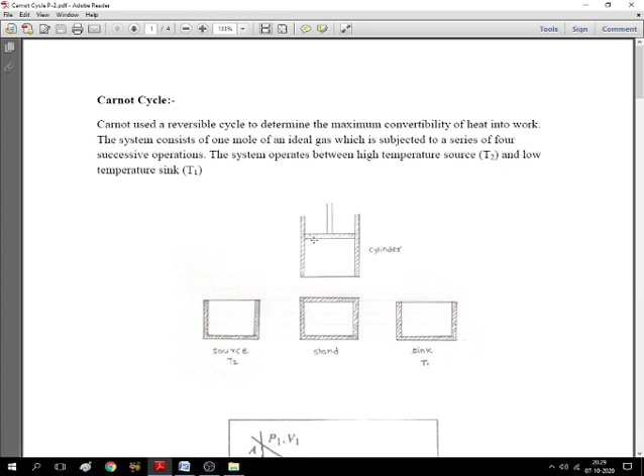It has a source of heat energy at temperature T2, a sink to which we add heat energy at temperature T1, and a stand which is an insulator. These four parts represent a heat engine, which performs 4 operations.

First operation is isothermal reversible expansion, represented by curve AB. Second is adiabatic reversible expansion, curve BC. Third is isothermal reversible compression, curve CD. Fourth is adiabatic reversible compression from D to A.

In this way the operations take place so that the system returns to the initial state through these 4 steps, and that's why it is a cyclic process.

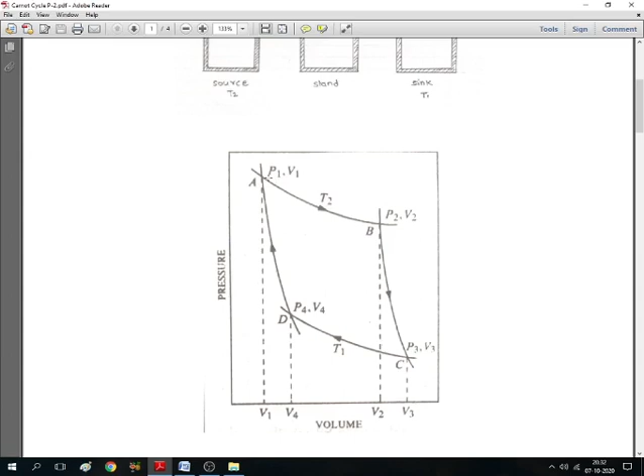Now let us see the mathematical part of this Carnot cycle.

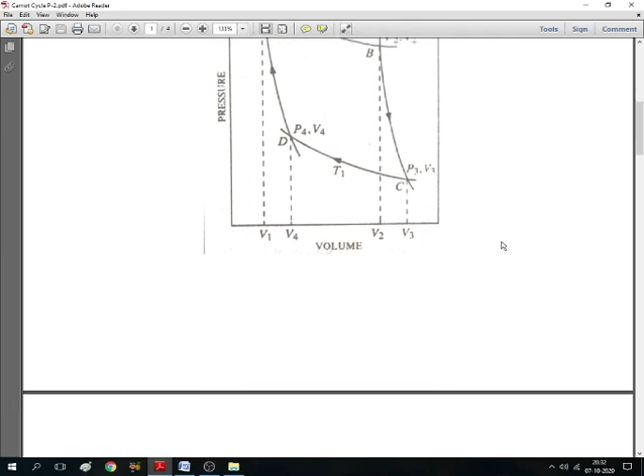The first operation is isothermal reversible expansion. The gas is allowed to expand isothermally and reversibly at a constant temperature T2. Volume increases from V1, represented by point A, to volume V2, represented by point B. As the process is isothermal, there is no increase or decrease in temperature.

When temperature is constant, the change in internal energy is also 0, so Delta U is equal to 0, since the process is isothermal. According to the first law, Delta U is equal to Q plus W. As Delta U is 0, we can write Q plus W is equal to 0. Rearranging, Q is equal to minus W.

Suppose this is the first step, therefore Q2 be the heat absorbed by the system and W1 be the work done by the system. Therefore we can write Q2 is equal to minus W1. Now this is the work done.

It is isothermal reversible expansion, and whenever there is isothermal reversible expansion, as we know the work done is of the maximum type, given by the equation W is equal to nRT ln V2 upon V1, where V2 is final volume and V1 is initial volume.

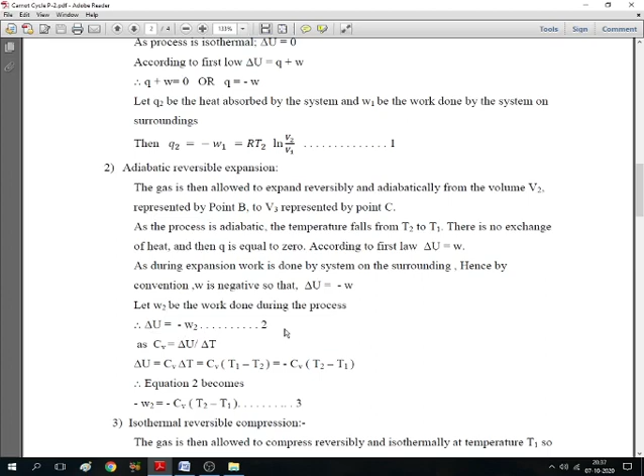Work done in the second step is W2, and here we can write delta U is equal to minus W2, equation number 2. But according to the definition of molar heat capacity at constant volume, Cv is equal to delta U by delta T. Delta U is change in internal energy, delta T is change in temperature.

Rearranging it, delta U is Cv into delta T, where delta T is change in temperature, final temperature minus initial temperature. Here our temperature falls from T2 to T1, that means final is T1, initial is T2, therefore it is T1 minus T2. Now taking the negative sign outside the bracket, this T1 becomes minus and T2 becomes plus, and we get minus Cv into bracket T2 minus T1.

Here the minus is taken outside the bracket, so our equation becomes minus W2 is equal to minus Cv into T2 minus T1, equation number 3. Now this is about the second operation.

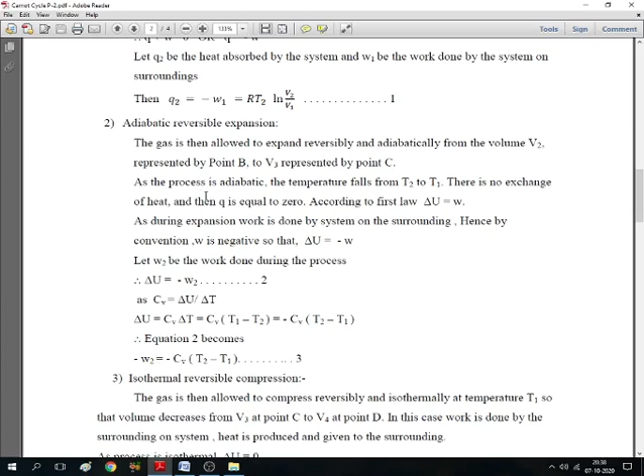Now the third operation, again it is an isothermal process. Compression is there, there is a decrease in volume, now the volume decreases from V3 to V4. Initial volume is V3, final volume is V4. The process is isothermal, therefore delta U is equal to 0. According to the first law, delta U is equal to Q plus W, and if delta U is 0, therefore Q plus W is equal to 0, or W is equal to minus Q.

W is equal to minus Q. Now this is the third step, and in this third step, whatever heat is generated, as the process is isothermal and compression is there, that heat is given to the sink, that amount is Q1. The process is isothermal, temperature remains at T1, and the work done during the third step is W3, and therefore we can write equation 4 like this.

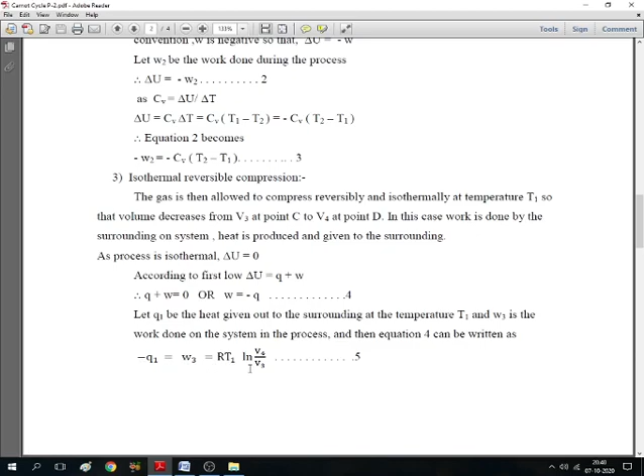Minus Q1 is equal to W3, and again it is an isothermal reversible process. Here we get W is equal to nRT ln V2 by V1. N is 1, therefore it is not written here. R is gas constant, temperature is T1. This process is carried out isothermally at temperature T1, therefore T1 ln final volume is V4, initial volume is V3, and therefore we get minus Q1 is equal to W3 is equal to RT1 ln V4 by V3, equation number 5.

Now the fourth and last operation, adiabatic reversible compression. Adiabatic condition, no heat is absorbed. If heat is not absorbed, compression is there, therefore there is increase in temperature. Temperature increases from T1 to T2. Heat is not absorbed, therefore Q is equal to 0.

According to the first law, delta U is equal to W. Let the work done in the fourth step be W4, therefore we can write delta U is equal to W4, equation number 6. Now again, according to the definition of Cv, molar heat capacity at constant volume, it is equal to delta U by delta T. Rearranging, delta U, change in internal energy, is equal to Cv into delta T.

Delta T is the change in temperature, final minus initial, T2 minus T1. Putting this value in equation 6, we get W4 equals CV times T2 minus T1, equation number 7.

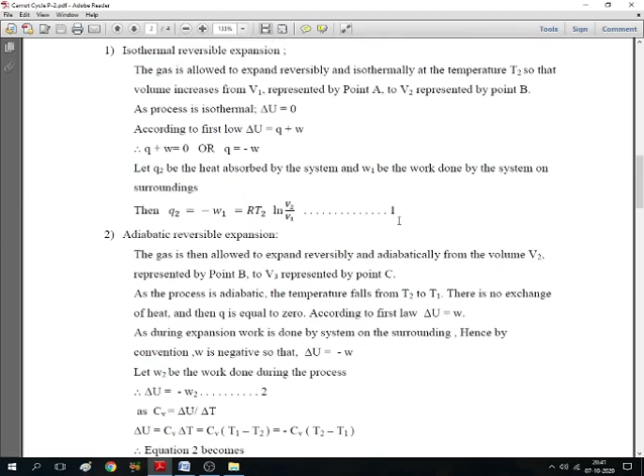We get the main equations: equation number 1, Q2 equals minus W1 equals RT2 ln V2 by V1. Equation number 3, equation number 5, and equation number 7. These are the four main equations obtained during the four different operations.

Now the net work done is given by the total work done. W equals work done in the first step, plus work done in the second step, plus work done in the third step, plus work done in the fourth step. Summing all four, we get the net work done: minus W1 in the first step, minus W2 in the second step, W3 in the third step, and W4 in the fourth step. Now put the value of minus W1 from equation number 1.

Minus W2 from equation number 3, W3 from equation number 5, and W4 from equation number 7.

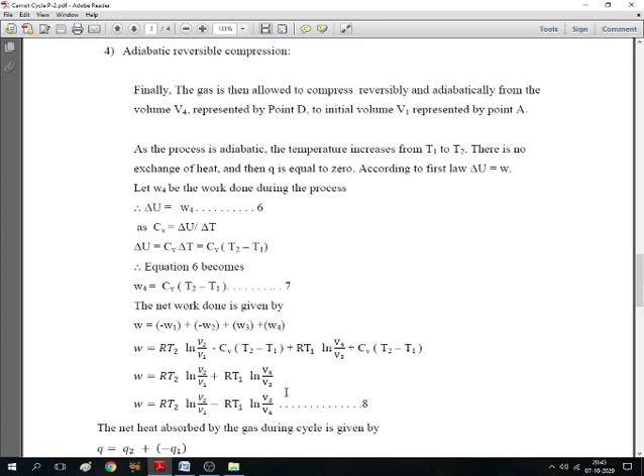Clear, we will get equation 8. This is the net work done.

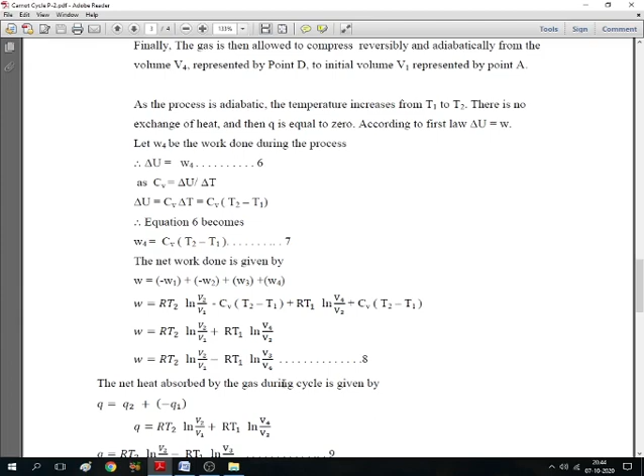Similarly, the net heat absorbed by the gas during the cyclic process is given as follows. We know this is a cyclic process, but heat is absorbed only in a step, that is the first step and the third step. In the first step heat is absorbed, in the third step heat is given out, and therefore the net heat absorbed is given by Q equals Q2 plus bracket minus Q1.

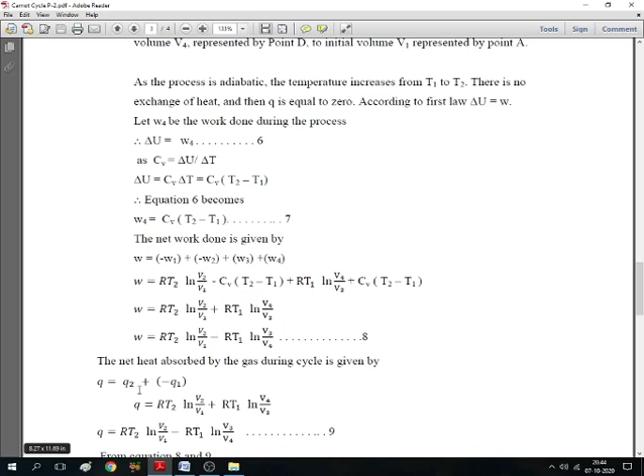If you put the values of Q2, the value of Q2 from equation number 1, and the value of minus Q1 from equation number 5.

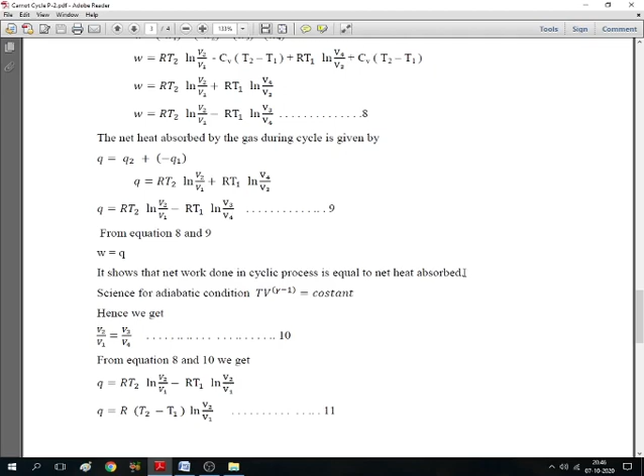Now clear? This is the second step. The first step was the four operations. In the second step, we have to prove that W is equal to Q, and then we move to the next step.

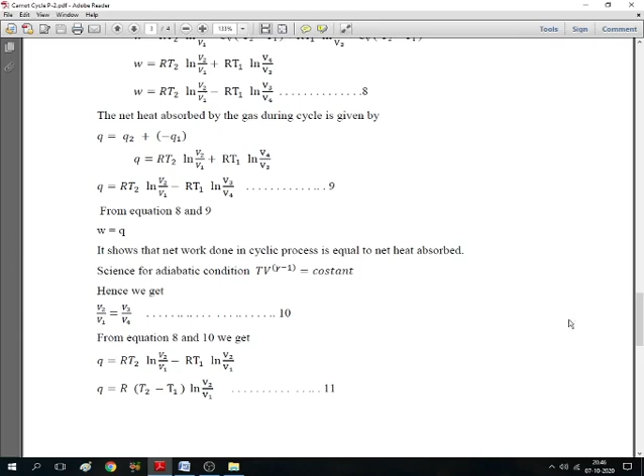For an adiabatic condition, T into V raised to power gamma minus 1 is equal to constant. This is a condition for adiabatic processes. Whenever there is an adiabatic condition, temperature into volume raised to power gamma minus 1 equals constant. By using this equation, we can apply this term to the adiabatic points, and we will get equation number 10. Let us see how that equation 10 is obtained.

Now here is the first operation at the adiabatic point, and from B to C there is adiabatic condition. At point B, what is the temperature? It is T2. What is the volume? V2 raised to power gamma minus 1 is equal to constant.

At point C, temperature is T1 and volume is V3, raised to power gamma minus 1, equal to constant. If we equalize these two terms, we get equation number 1: T2 V2 raised to gamma minus 1 equals T1 V3 raised to gamma minus 1. This holds because points B and C lie on the same adiabatic curve, so we can write this equation for points B and C.

Similarly, there is an adiabatic condition along the curve AD.

Therefore, at point A, it is T2 V1 raised to power gamma minus 1. Here is T1 V4 raised to power gamma minus 1. We will get equation number 2.

These two equations can be equalized as they are on the same adiabatic curve. We will get equation 1 and equation 2. Divide equation 1 by equation 2, and we will get this equation.

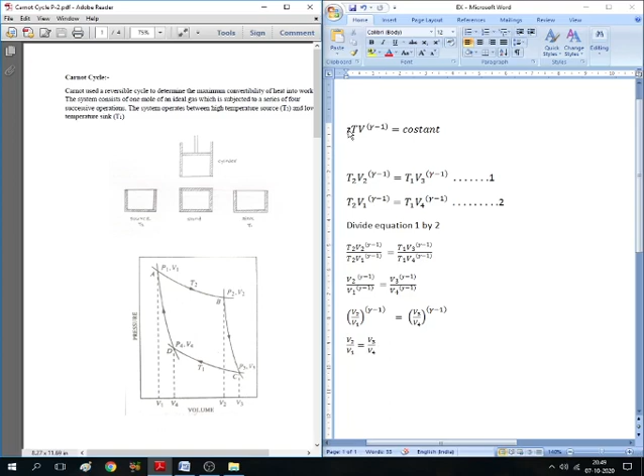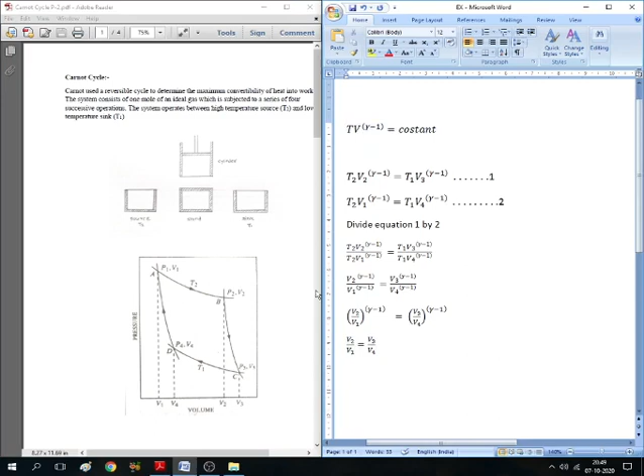That is, TV raised to power gamma minus 1 is equal to constant. We will get V2 by V1 is equal to V3 by V4. We will get this equation.

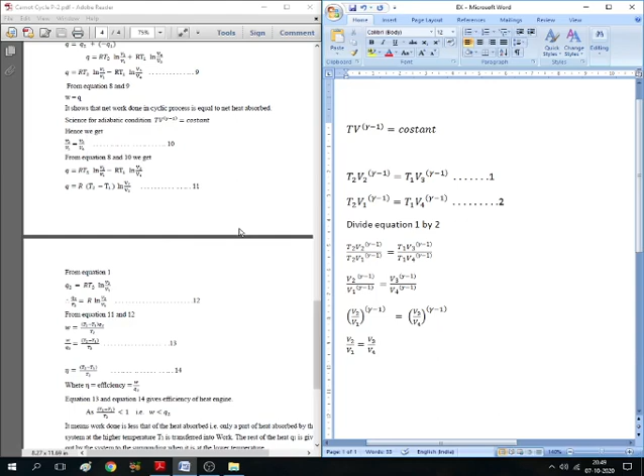Now here is the equation for the adiabatic condition. Since for adiabatic, TV raised to power gamma minus 1 is constant, hence we get V2 by V1 equals V3 by V4, equation number 10. Clear? Now this is equation number 10.

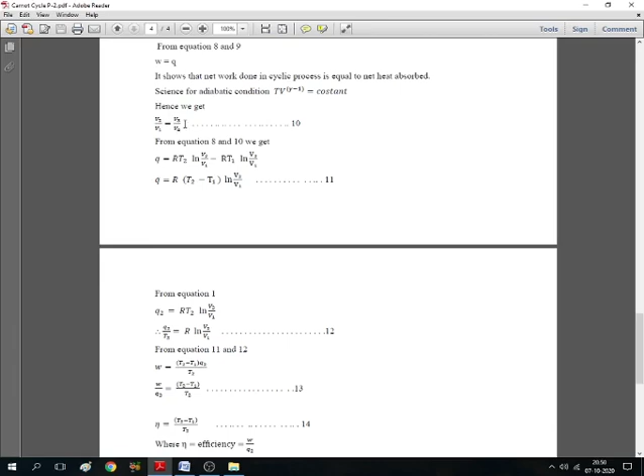Now from equation 10 and equation 8 - this is equation 8, here is V2 by V1, here is V3 by V4.

Now instead of V3 by V4, we can write V2 by V1 from equation number 10, and we get Q is equal to RT2 ln(V2 by V1) minus RT1 ln(V2 by V1). Now R is common, ln(V2 by V1) is common, giving us the bracket T2 minus T1. We get equation number 11, that is Q is equal to R into bracket(T2 minus T1) ln(V2 by V1).

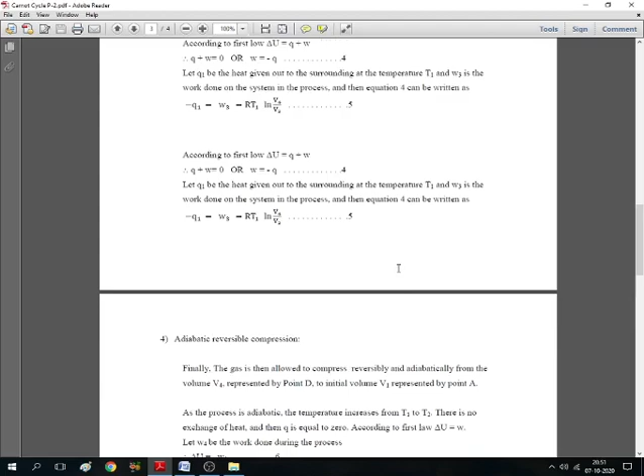Clear? Equation 11. Now let us see equation number 1. What is equation number 1? Q2 is equal to RT2 ln(V2 by V1).

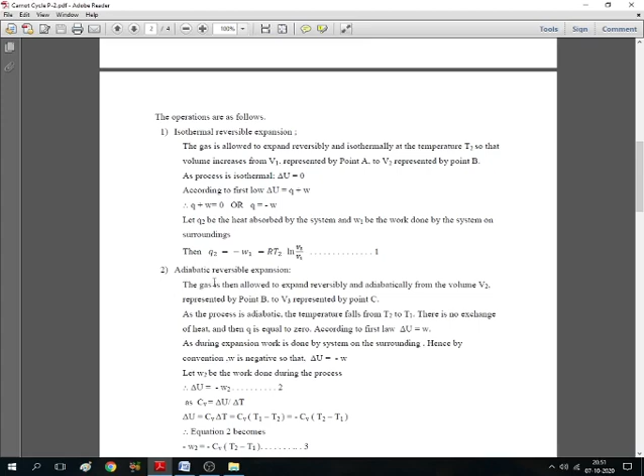We rearranged this a little. If we bring T2 to the left side, we get Q2 by T2 is equal to R ln(V2 by V1). Now the same thing: from equation number 1, Q2 equals RT2 ln(V2 by V1). Rearranging it, Q2 by T2 is equal to R ln(V2 by V1), equation number 12.

Now from equation 11 and 12, instead of R ln(V2 by V1), we can write this Q. Now Q is equal to W, therefore we can say W is equal to R(T2 minus T1) ln(V2 by V1). From equation 11 and equation number 12, we can write W is equal to (T2 minus T1) into Q2 upon T2.

Now transfer this Q2 to this side. W upon Q2 is equal to (T2 minus T1) upon T2, equation number 13.

Now we know that the ratio of work done to the heat absorbed from the source is called efficiency, and therefore eta is equal to (T2 minus T1) upon T2, where eta is efficiency, equal to W upon Q2. Now equation number 13 and equation number 14 give the efficiency of the heat engine.

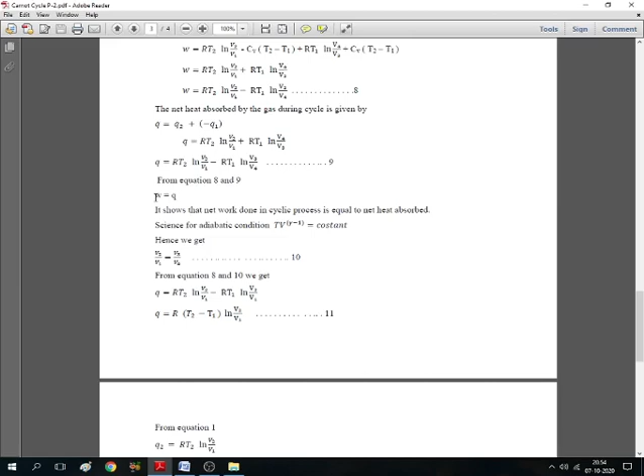In this way, in the Carnot cycle, we derived an equation for efficiency. Now this is the equation for efficiency. We proved that in the cyclic process, net work done is equal to net heat absorbed - that is what we proved here.

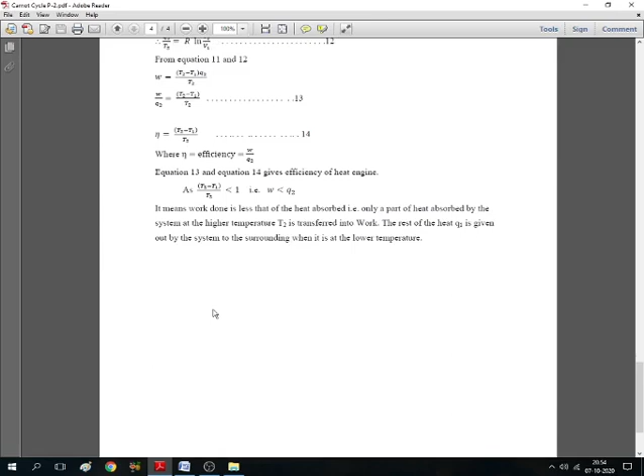In this way, we discussed the total Carnot cycle today. This is about the Carnot cycle. Now we will stop here. Thank you.